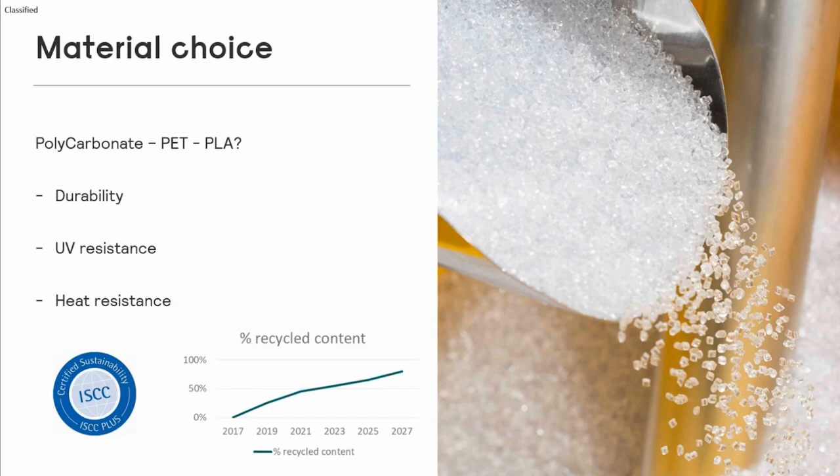Second choice you need to make: once we had chosen our material, polycarbonate, for its durability, for its usability in the lighting industry, and we have proven that we can cycle up the recycled content continuously, right now at 75%, then you need to put it in a printer.

Now there's various ways of printing. You have fusion printing, jetting, extrusion, photopolymerization, and many more. We chose FDM printing, which is fused deposition modeling. You can see one of the very first printer makers in the industry, MakerBot, way over a decade ago, had also reasonable, affordable printers. So one of the decisions was also affordability.

FDM printers are actually the lowest threshold on price available, shown by the fact that the most used consumer printing method and printers around the globe these days are all FDM based. One big benefit, as you can see in the picture, is it's fairly easy as a manufacturer to work on the machine itself, because most of the components and hardware, as you see on this MakerBot example, are accessible. So as a manufacturer, you can tune and tweak the printer.

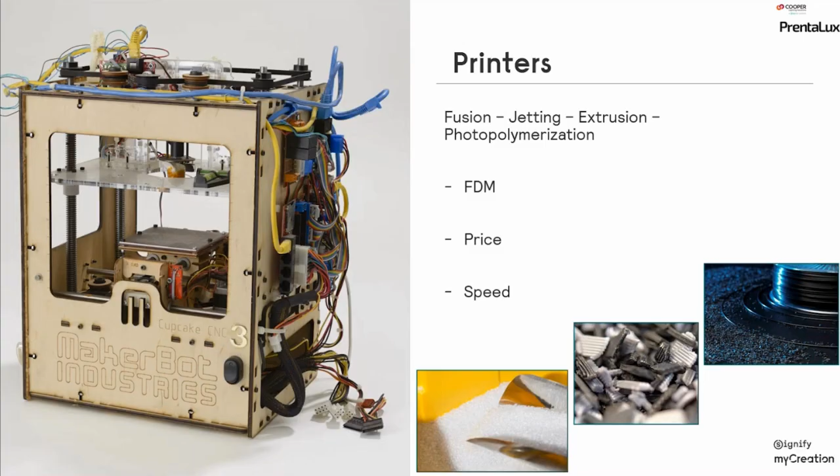Because we took a tough material, we had to tune and tweak those printers so that our material, from granulate to filament, could be used on this platform.

Then comes the next step: you need to build a factory out of this. You will not be surprised, myself and hundreds of thousands of people these days own a 3D printer at home. It's a vast industry, a great industry, and I would invite you all to consider, as you can see on the screen, there are multiple brands where you can buy a very good desktop home 3D printer and have fun.

However, we wanted to apply this for mass production. As you can see on the printer in the picture on the right, we need to start building an inline, continuous operated setup so that these machines can print our very durable but difficult material, polycarbonate, at an efficient speed and sufficiently automated.

I will tell you that automation, from what you see there, which were the first laboratories, is where we attempted to figure out how we can make a printer run longer hours a day without any stops or interruptions. How can we improve the automation so that components are actually auto-ejected? How can we ensure these machines are actually licensed to be used in a factory?

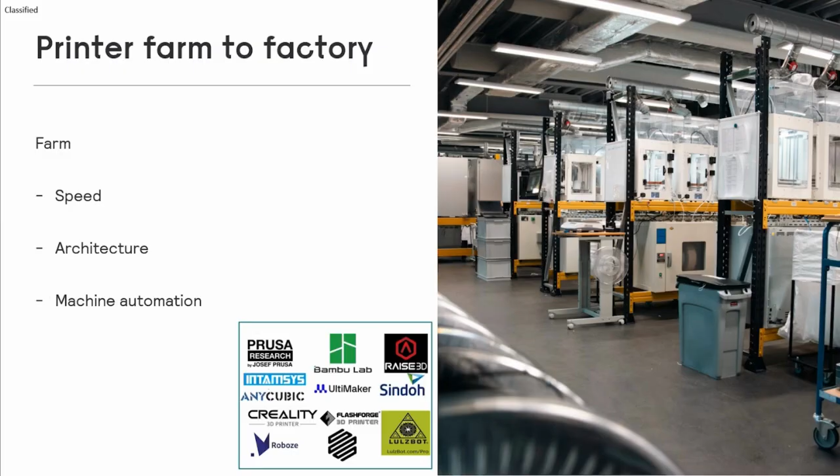We are heating polymers, so for health and safety, as you can see in the picture, you need to ventilate the air, subtract whatever might be harmful, and put filters in place so you can capture that. Anything and everything that goes with a plant had to be discovered.

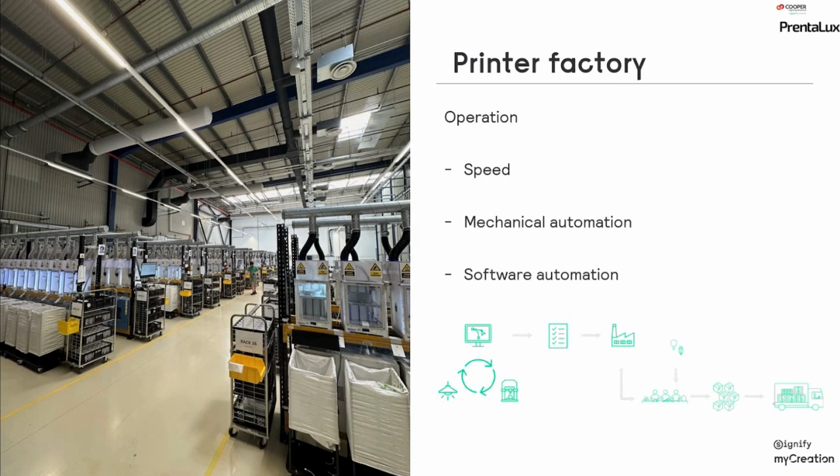And then you see where we ended up today. On the left-hand side, this is actually a real-time picture of our facility in Hungary, in the middle of Europe. It's very comparable to what we have in the USA in Littlestown, very near Gettysburg, and also what we have in Atlanta, Georgia. The name of the game is speed, meaning the printers can print fast and continuously, 24/7.

Speed is also automated, so the heat-up temperature for you to be able to start and print a component, the cool down for you to be able to auto-eject the component, and then start reprinting - all these things have to be organized. What have we learned?

We learned that from those printer desktop models, you can access them and with FDM printing start printing polycarbonate in a very sustainable way. But it took 3 to 4 years to come to this picture, making sure this is a safe environment for people to work in, with the exhausts, automation and safety measures that industrial equipment requires.

To make sure that it becomes a viable economical situation, fast, automated and reliable. And last but not least, we had to write our own software to make sure you govern all those machines, so whenever a machine does go into failure, operators know where that happens. I could continue, but in view of time, I will limit that to this.

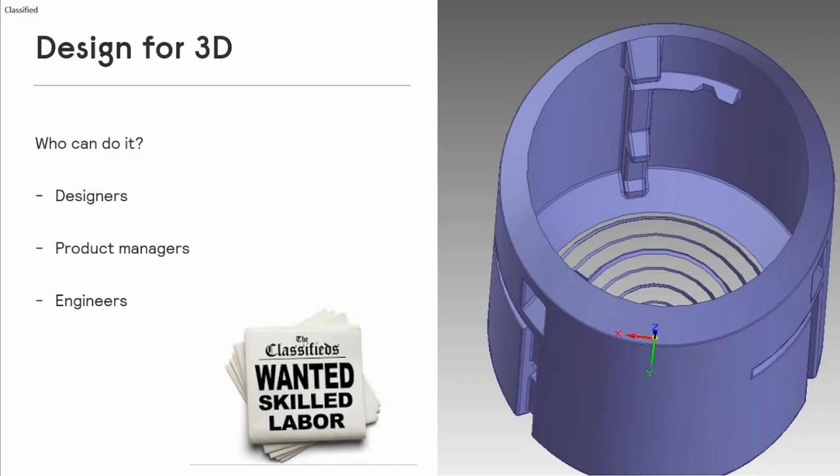Because you can see on the screen, we are now no longer bound to the conventional rules of creating an object. We need to reprogram our engineering and design community to those almost unlimited boundaries in the additive manufactured 3D world. Work to be done, work moving along.

That's why these days, if you start with additive manufacturing, I advocate the easy entry. In the lighting industry, that easy entry you can see on the picture was typically suspended luminaires. Why? They tend to be particularly round, and something you can build from the bottom upwards in a reasonably symmetrical shape or dimension.

And that means for engineers and designers, it is fairly - well, 'easy' is a word I've used a few times - but within a realm of 9 to 15 weeks, it's something people in additive manufacturing can learn how to do: how to make your CAD drawing into G-code, which the printer understands, how to optimize that through slicing software so the printer really understands what you're doing, and then get a result as on the picture.

There's small drawbacks. If you do that, because of FDM printing, we are literally a tube of toothpaste that you start squeezing and the material comes out, building up the model you have envisioned, just like the picture. That means your end result will consist of lines stacked upon each other, and in the end result you do see those lines.

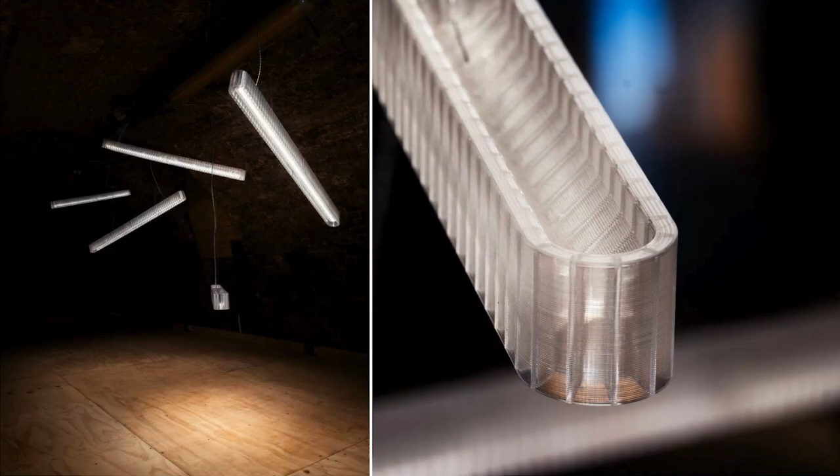And then the end result are inspiring things like this, where linear elements will become something that in its texture, in its either translucency or non-translucency, in its architectural constellation will become standardized, a configurable solution for the market. These are the things that we're heading for with additive manufacturing.

Simply put, for the customer, because in the end we can talk about the industry, we can talk about what we want, but freedom of design, ensuring that the latest state of technology is integrated, because you've heard it, we can print at any point in time what we want.

So if there is new technology, in our case lighting technology, we do not have to wait until we've depleted a former stock or till we've depleted a former design, because those designs are only printed on demand anyway. So as soon as technology upgrades, we can integrate it, ensuring that the performance, whether it's energy performance, whether it's lighting quality performance, is always integrated.

We of course touched upon the sustainability, where I will round off this speech. And last but not least, do that very reliable and trustworthy, because everything is configurable and not depending on molds. Because everything you heard me saying is local.

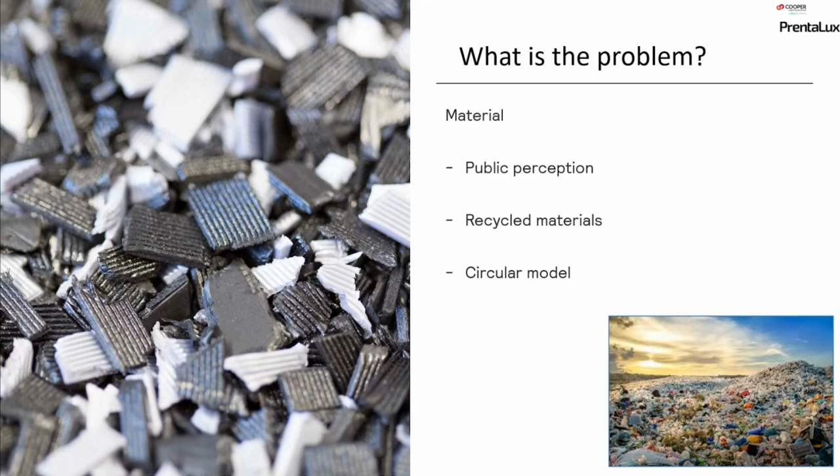We need to constantly learn. When I started with my team, and when the team started within Cooper a few years back, I can guarantee you none of what they learned then is still valid today. Additive manufacturing, material knowledge, printer knowledge, and software knowledge - all those angles that need to come together for efficient, fast and durable 3D printing - it's changing every day, which is cool because it's a constant innovative platform, but it's also a difficulty.

We need to manage all of that: the speed and the machines, the maintenance and the upgrades, the industrial setup that always needs to be adapted and upgraded. It is a challenge in mass production with additive manufacturing to literally stay up to speed.

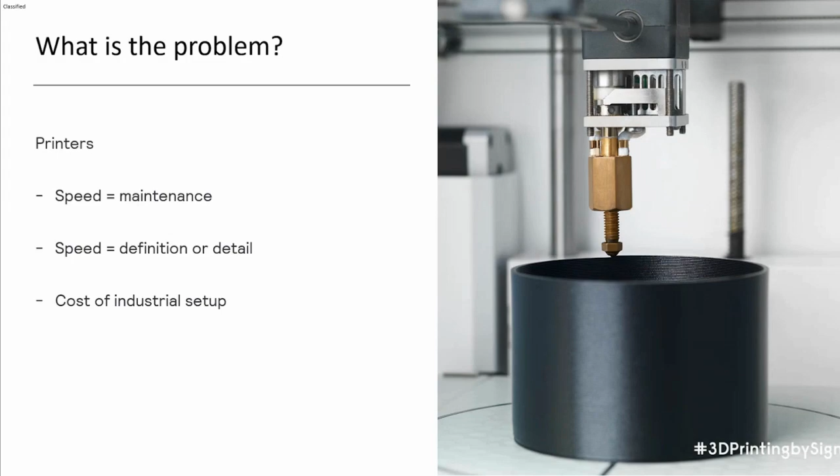What is valid today, I'm pretty sure in 6 months from now will again have evolved for the better. Doesn't make it necessarily pleasant and easy for us to follow.

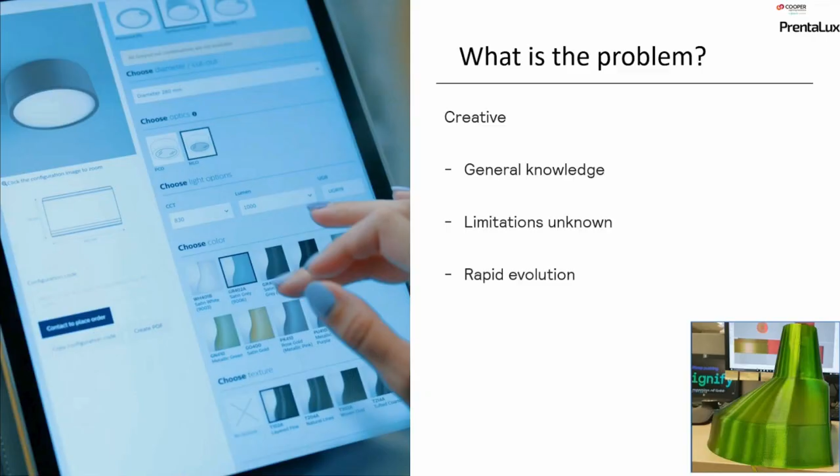I promised you at the start that towards the end I'd highlight how far we've come in our center point. We had the Global Economy Challenge and the Innovation Opportunity, but in the middle, we chose, as Signify and as Cooper, to take the ability of taking sustainability towards a truly circular economy. I promised you to highlight what we've achieved.

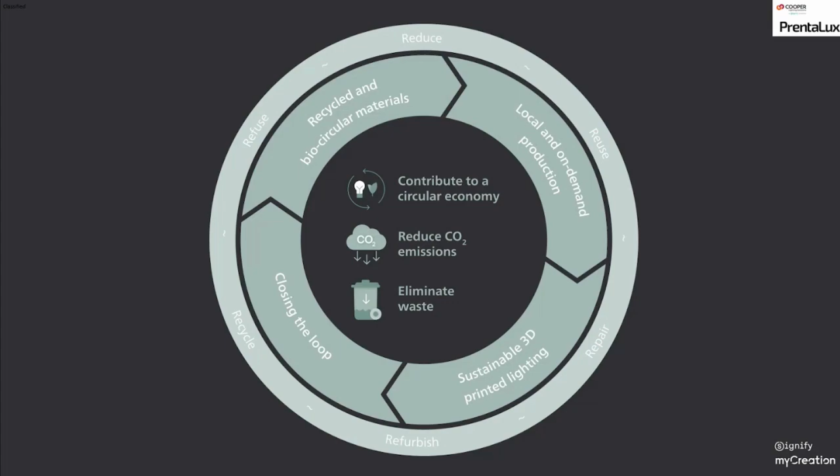What we see today with additive manufacturing is that at least 65 - and I'm happy to mention, if you go online next week you'll see 75, because we are upgrading our circular content - we have been able, because of our engineering community that is ever expanding and learning how to work with additive manufacturing, to reduce the number of components we use in our luminaires.

Because one of the most important mantras of sustainability is use less. If you can design smarter components, you simply need to use less, which means less sourcing, fewer trucks on the road, because those components that we print come from one spot, one factory that brings that filament to a product in the market. Because we have learned to make them more intelligent and smarter, we can start what we call design for maintenance and disassembling.

I'm happy to share with you that none of our products use adhesives. All of our products have restrained the use of difficult screws and other adhesive manners, so that you, as a consumer, professional or private, have the right to repair your luminaire. You can take it apart, you can repair that single component.

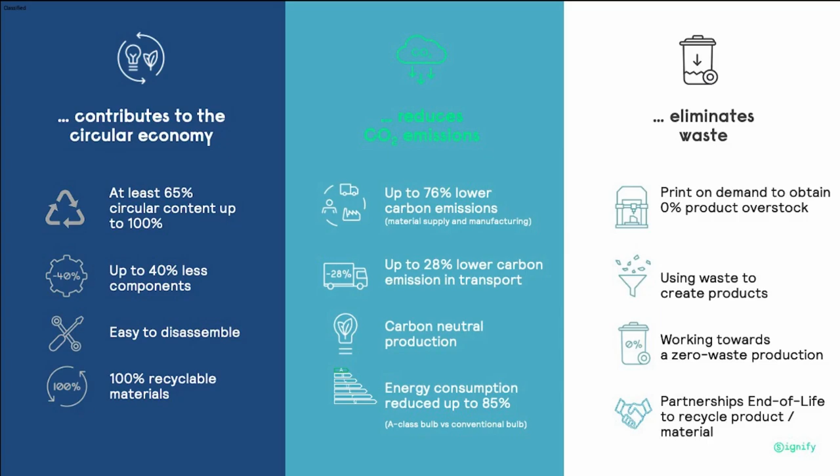Imagine designing outside the box, creating beyond every catalog, and realizing all you wish for in a brand new, sustainable way. Dream out loud in every dimension. Feel the absolute freedom to follow your own vision and reshape the future. More durable, more beautiful, without blueprints or boundaries, without restrictions or restraints. It's time to create your own signature and bring the circular vision to life. Signify MyCreation. Remarkable lighting, sustainably printed.